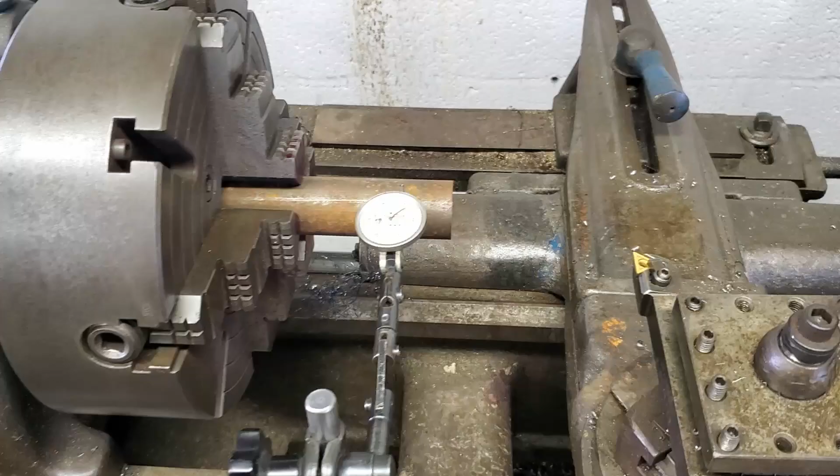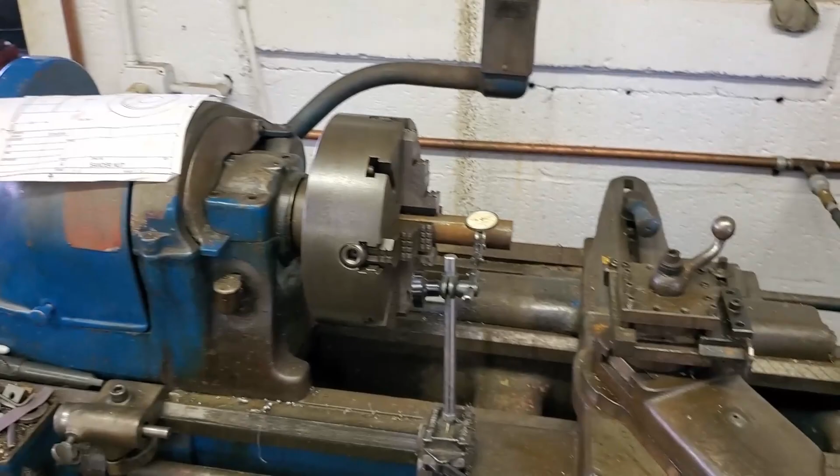Okay, so today we're doing a grinder nut. I think I'm going to do a little bit of a tutorial style video, but not really, I guess I'll just make a little basic tutorial. This is just more like how I operate the lathe, not probably the right way, but just the way I've come to know to run it.

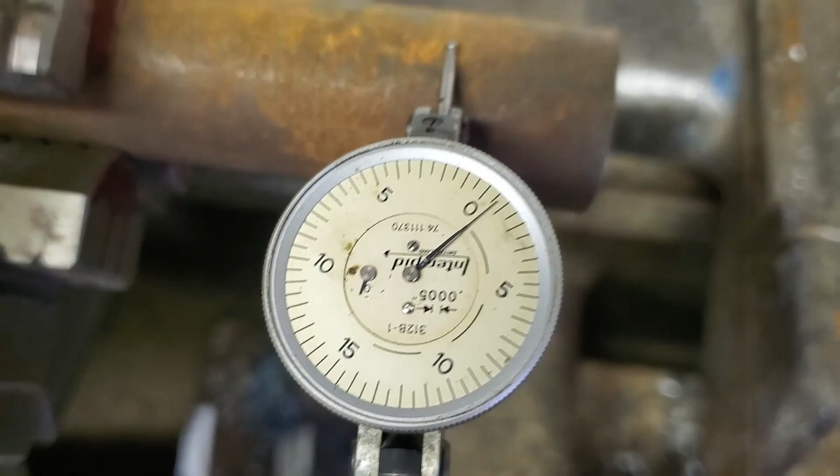Around here we have 4-jaw chucks, so everything has to be indicated in, which I like because it's very repeatable. 3-jaw chucks are not very repeatable, so that's pretty darn good, I'd say pretty much perfect. I've gotten pretty quick at it. People make it sound like a big deal, but I can have it indicated in no more than a minute, and it's worth it to get good quality pieces.

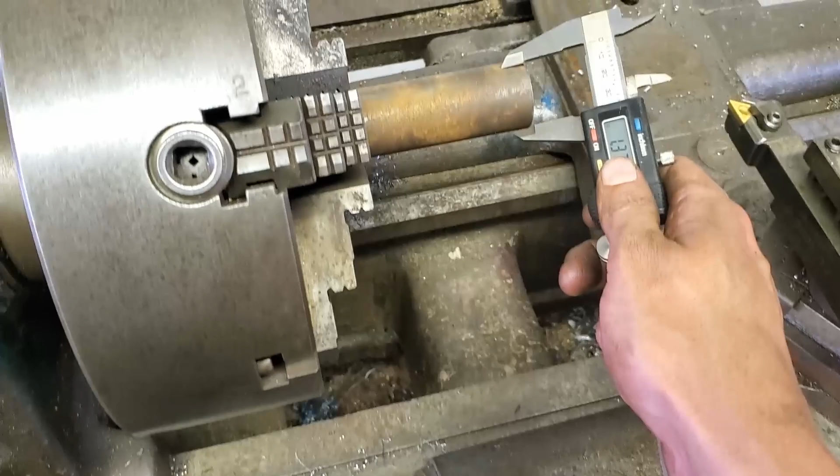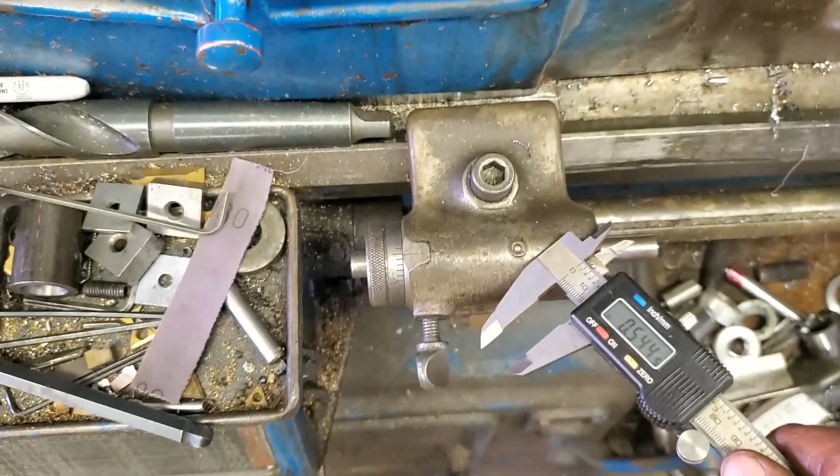So I believe this is 1 3/8, I don't remember, but I'm almost certain of it. So yeah, it's 1 3/8. What I'll do is turn this down to 1 1/4, which you can see here, because that's the big diameter. Then I'll face this off, and I'll use gauge blocks, I'll show this later, to set this at 525, set my stopper, and just turn into my stop. Simple as that. I'll come back in one second.

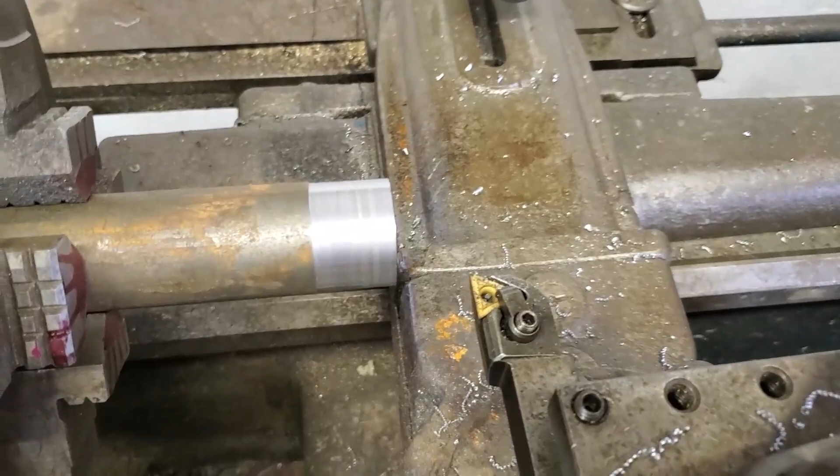Okay, so I just took my first cleaning pass, and this is a great time to get your dial set to a nice number like 0, 10, or 20, so when you do your math you can easily add. You don't want it on something like 7 or whatever, it's tough to do your addition like that and keep track of everything.

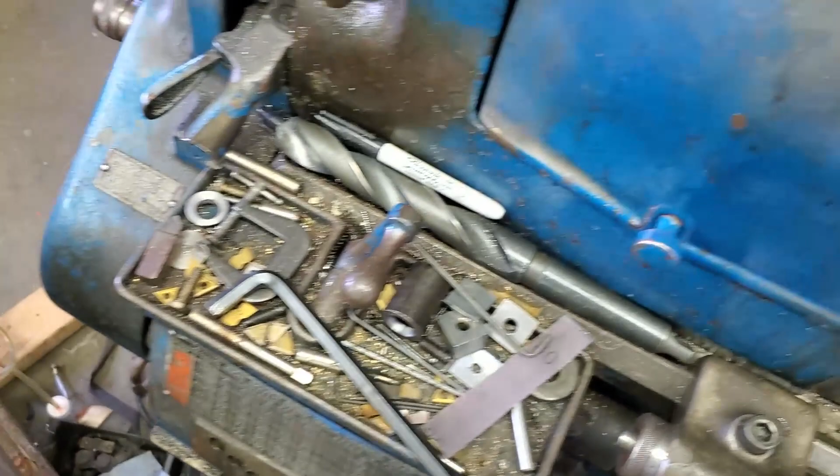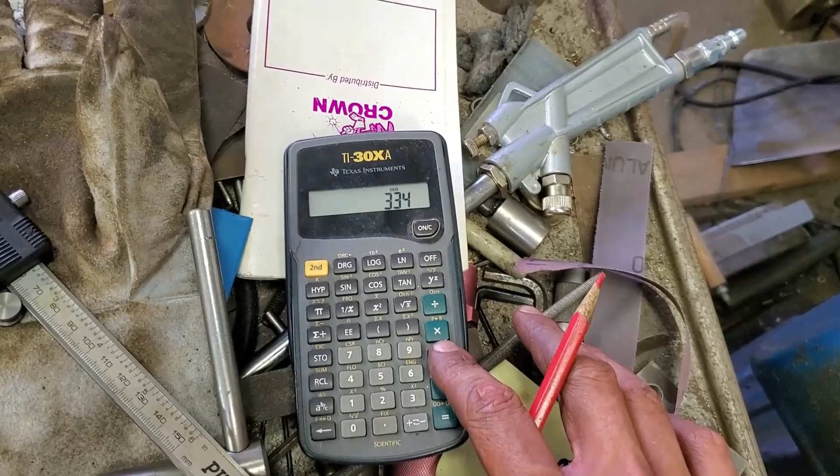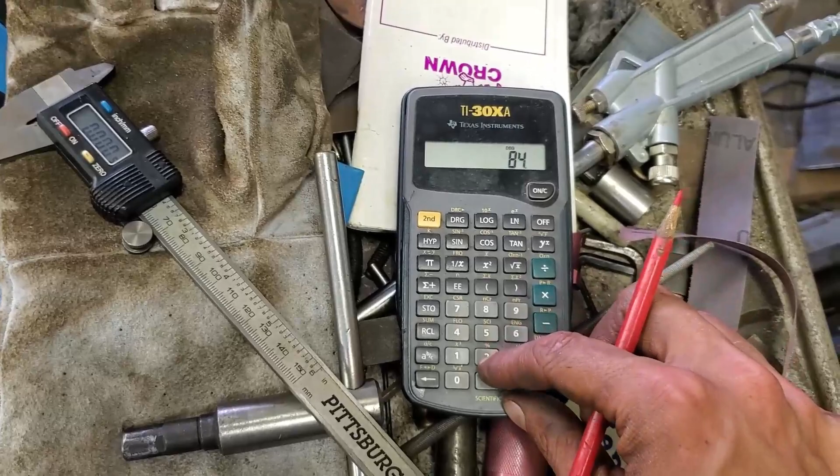So you can see we're at, we'll call that 334. So then I take my sheet and do 334. Whoops, it's kind of tricky to do when you're looking through the camera. So I got to go to 250. Now you come to your calculator: 334 minus 250, so I got to go 84 thousandths on the diameter. Now you got to make sure to divide that by 2, otherwise you'll have it all screwed up.

So here we go, we got 42 thousandths that we need to go. Here's where, like I said before, I'm on 0, so I know I can't take it past 42 on my dial. Of course this isn't that big of a deal in this application, but it's just kind of how it works. So I'll cut this down to the diameter, and I'll update from there, and show my gauge block spacing process after I face it.

Okay, so I just got those first couple cuts done, and as you can see we're at, it's tough, but it's right in there. My finish isn't beautiful, but it's at least smooth, and I think it's going to land right in here. This must be, I'm not going to say hard, but it's not as easily machinable as I wanted it to be.

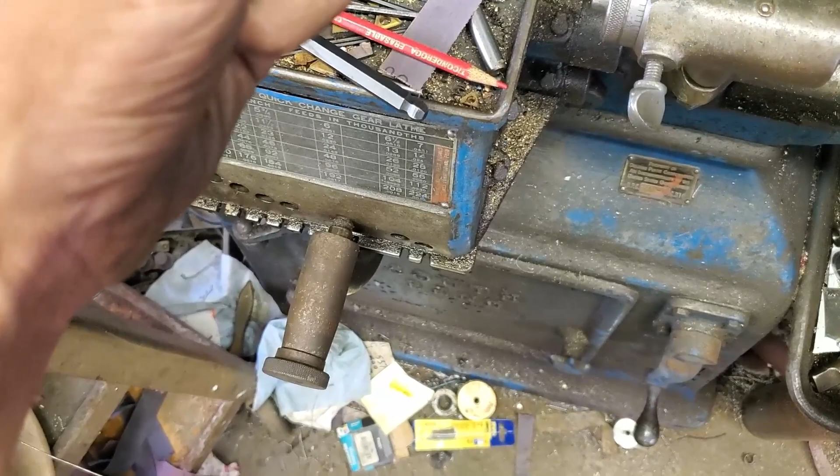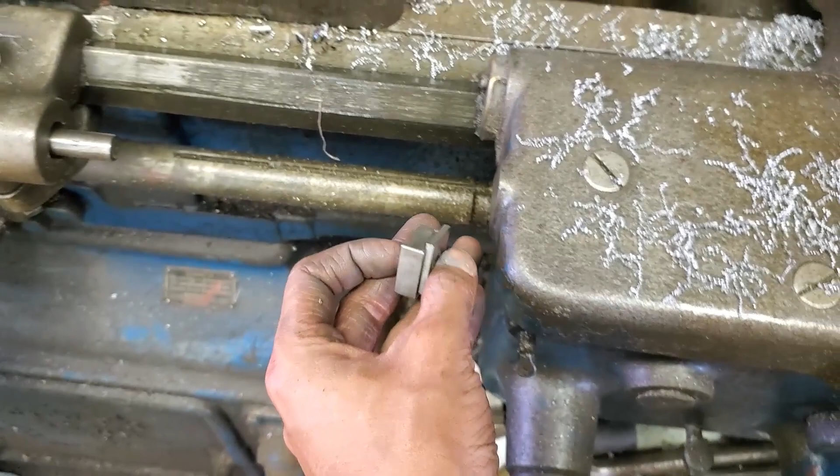So now I've got it faced, and I have not moved my carriage. What I do is I have a bunch of gauge blocks here that are all pretty common, like my 125, and there's my 500, and I know I need 525, so I think there's actually a 400 in here. Yeah, right there, see, so we got a 400 and a 125. Essentially I put them in here between this and this, then I slide this over, put my gauge blocks in there, tighten this down, and make sure everything's snugged up.

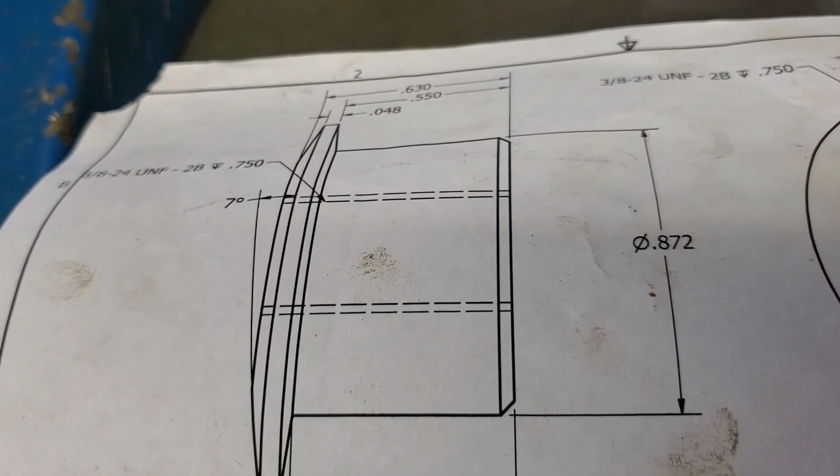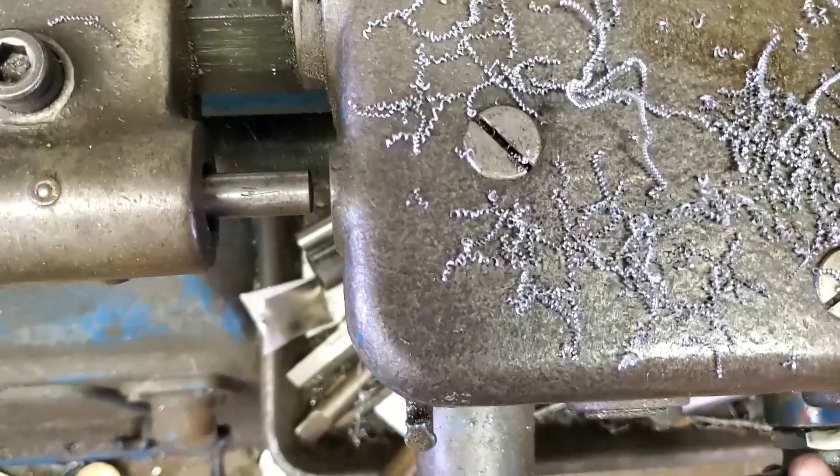That's a little tricky to do holding onto my phone, but I'll get there once I get it tightened down, I'll show it again here. Okay, so here we go. I did get it close, and then I snug it down with this dial, so I know I'm close, they're friction fit in there. So there, now my trolley stops, so that's exactly where we'll stop.

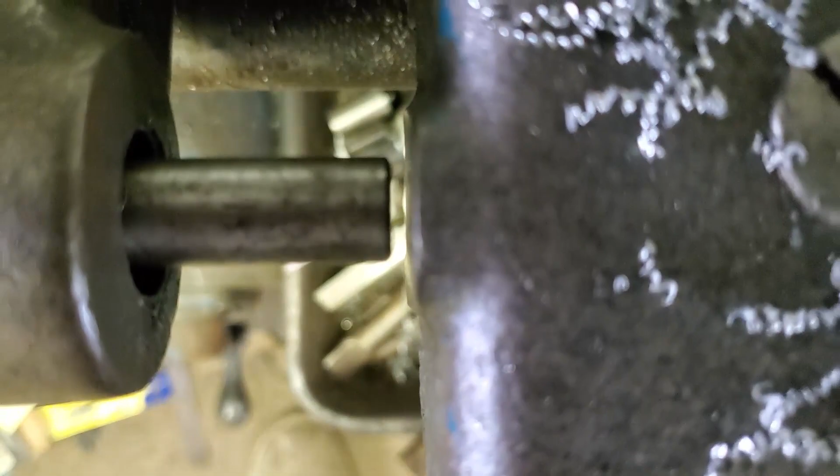550 thousandths from the back face, exactly what the print says. So pretty simple. Now we need to go down to 872 on the diameter.

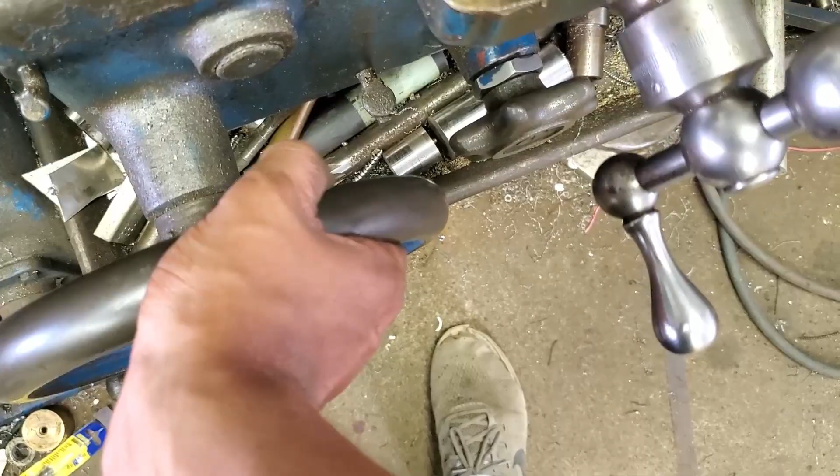We know we're at an inch and a quarter, but we know it's going to take a while anyway, so I'll take a few cuts. Maybe I'll go down one dial and then come back to 0 and remeasure, and then we'll have the numbers for that one. So let's get to it.

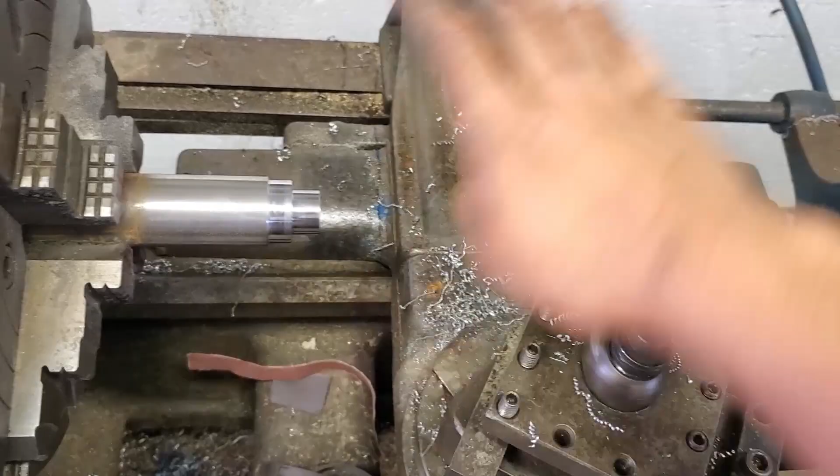Now this is kind of dangerous here, but I watch my gap close up. When it closes, I turn my power feed off by loosening this clutch, and then I bump it in by hand. I'll show you here. So you watch it, watch the gap close, right there. So now I take it by hand, then I finish it up to the stop. Then I reel it out, take my cut, re-engage my power feed, and go for it again.

So there you go, simple as that. Okay, so I just got this polished up. It's not bad, but oh well. I'm no perfectionist, I should say.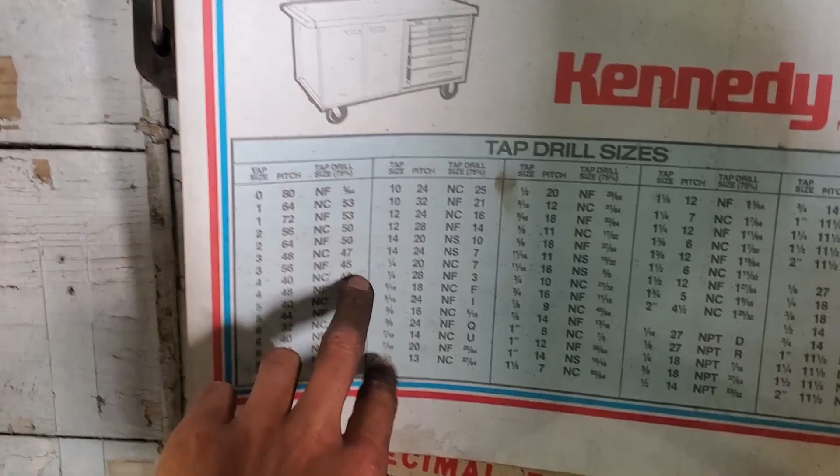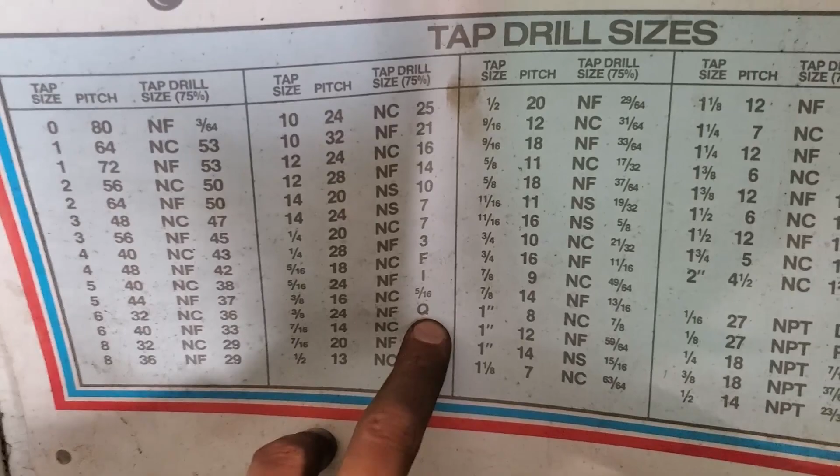Now it's kind of looking like we're gonna have to... we'll put just a little chamfer on that, and that. Whoops, hold on. And that's easy. All you gotta do is just like this, and we come over, and then we chamfer that because we don't need this stop anymore. I guess I can do it on camera. Pretty simple.

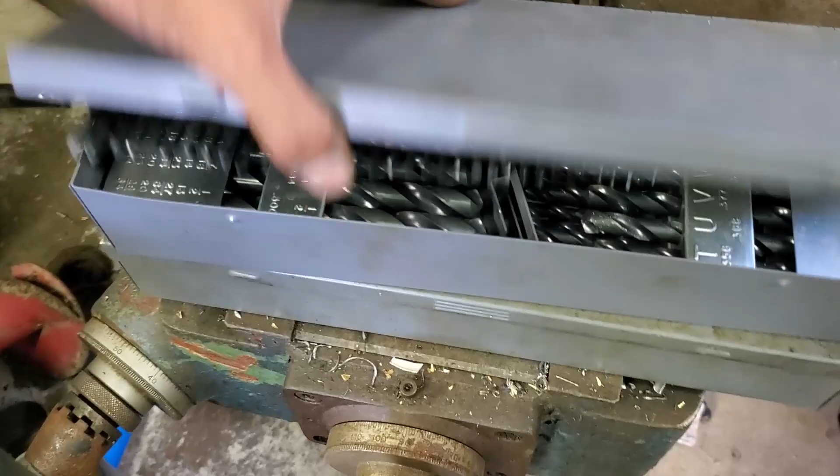We'll go a little more. There. Now there's a little chamfer on there.

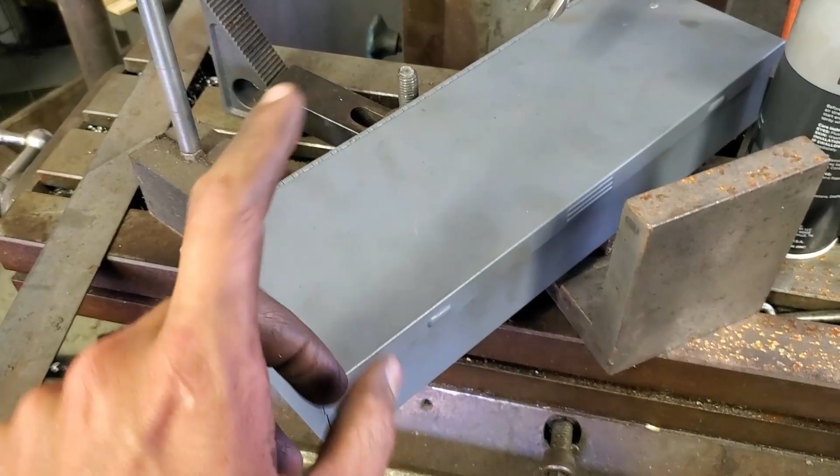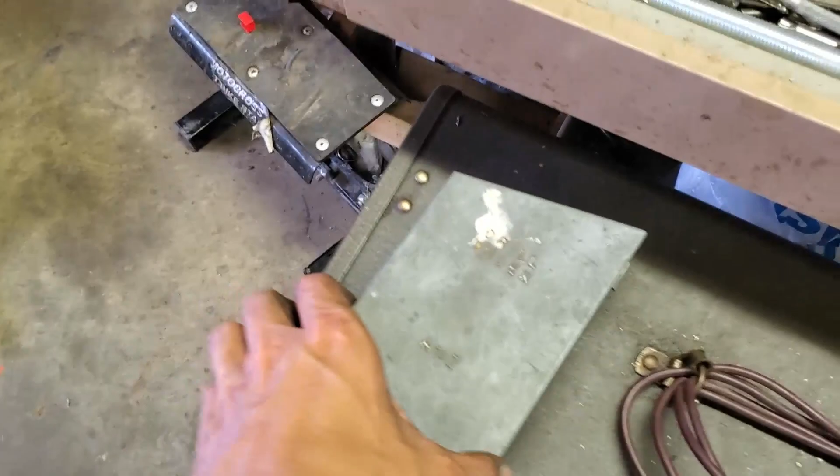And I'll get the... whoops. I'll get the drill here in the tailstock. I'll get everything all set up for drilling this hole. Here's my chuck, chucked up. Now I'll get a center hole drilled, and then I will.

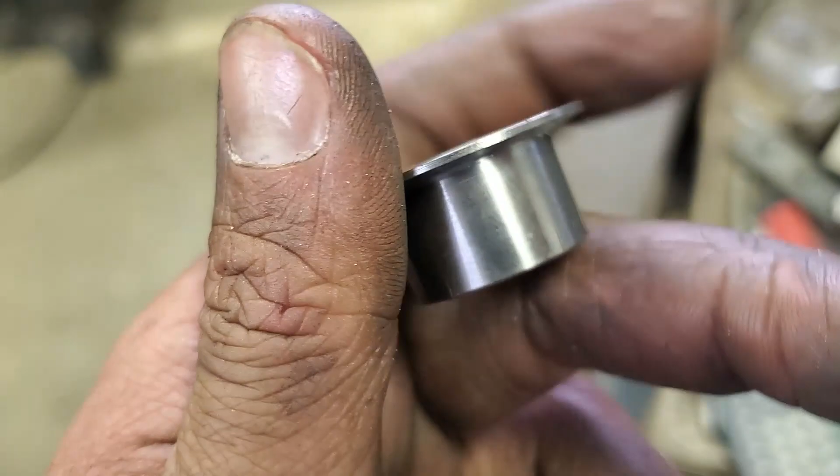Okay, so we come to the tap drill chart. We find us, oh there's 3/8. We have a 3/8 24, so we need a letter Q drill bit.

Easy enough. So now I run back. We should put this more near the lathe. I gotta walk quite a distance for it, but so now I go find my letter Q, and then we'll go from there.

Okay, so my drill indexes are all over the place because I've been trying to clean up, and I have a lot of miscellaneous drills.

So around our place we have two very nice drill sets here. They're here right now. So look, we got literally, it's like brand new, like they've never been used. That is like last worst case scenario, can't find a drill, we go into there.

So then we have this one. This is like really nice work. You know, there's only a few missing, whatever. So those are like our last resorts. But then we have some other old ones. Oh yeah, and there's a few missing, you know, over the years they got lost or broke.

Here's another set, and there's another project here. Here's another set here, and another index here. Like I said, they're usually all in our drill index drawer. So I don't know if this is how anybody else runs, but I always look in the crappiest kit first.

So then I look, yeah, I got a Q in here. So now I don't need to go into the next nicer kit, and then the next nicer kit. So I don't know, it's kind of funny, but over the years drill bits get broken, busted, and whatever. And they get lost, of course, because some clown doesn't put them away.